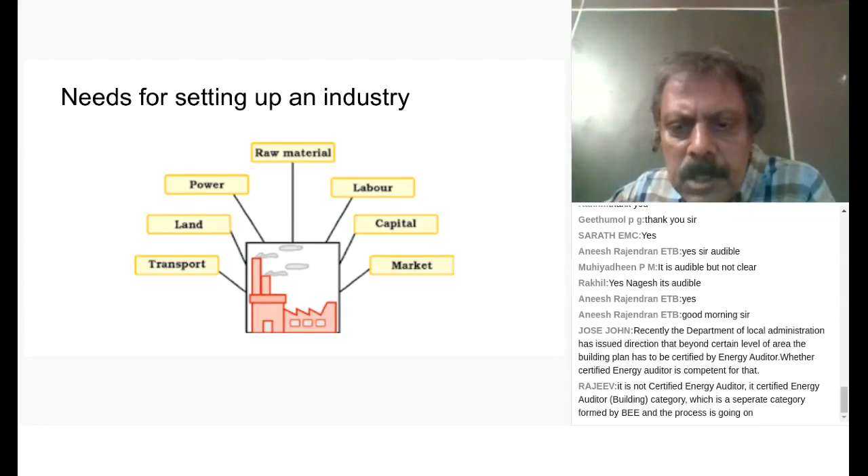So these are the various inputs, and of these, what can we reduce, where can we reduce easily? If you see this picture, raw material — can we reduce the raw material going into the product? It's very difficult. Once you've fixed up the production process, what we're going to do is produce with minimum wastage. So already we've decided on a manufacturing route with raw material getting converted into product with minimum wastage, so reduction in raw material becomes very difficult.

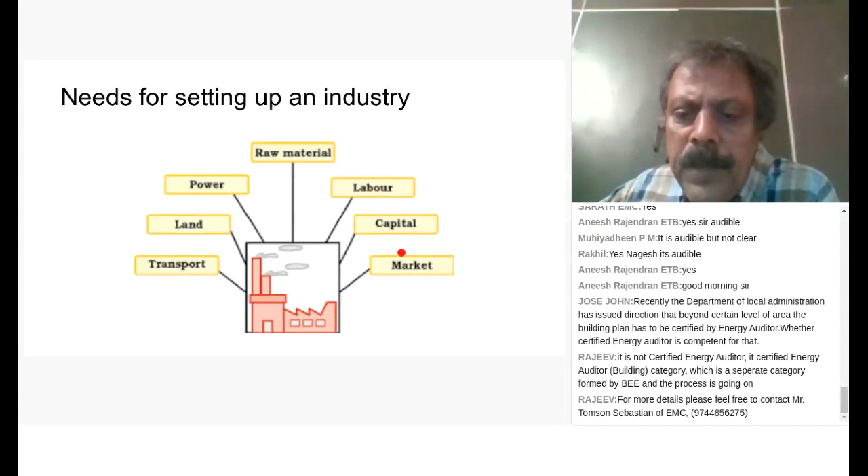Labor — minimum amount of labor is required for doing work, and you cannot minimize labor costs since there are minimum wages that need to be paid to engage labor. So labor costs are no longer considered cheap; labor is also a significant cost. Then the other costs will remain there. But one thing you can see here is the power or energy costs. The energy cost is something where a lot of potential exists.

So this is where we are going to focus, how to reduce the energy costs, because in any manufacturing activity there are a lot of energy wastages that are taking place. Many of these things happen by poor choice of equipment or gadgets in the design stage itself. So in the design stage, if the selection is proper, then your energy efficiency to a great extent is guaranteed. Then in the operations, if any energy wastages are there, that can be rectified by using some retrofits or simple modifications. But the most important thing is to have design stage energy efficiency incorporated into all the process equipment.

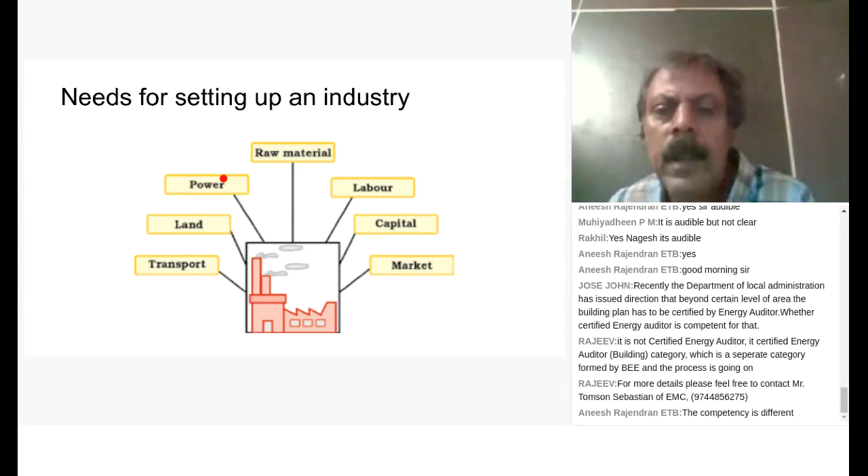Simple example is, suppose we are building a shed, and if you have closed the shed from all sides, daylighting is not coming into the shed, which means you have to use artificial lamps, tube lights or LED lamps inside the shed or the factory. So instead, in the design stage itself, if you incorporate the design for allowing natural light, then you don't need to use artificial lamps for lighting up the shed. So this is one example. Like this, we have several examples where at the design stage itself, if you take care, a phenomenal amount of energy can be saved, which will lead to cost reductions for the company.

Now, when we talk of the product, we are looking at a component called design for environment. This is very popular in European countries, DFE, design for environment. So while producing or designing the product, how best it can be designed so that after the final usage, it is not dumped into wastage. So there is a circulation which takes place. Whatever is the waste, it is recycled back, and again products are produced. So there is nothing called ultimate discharge into the environment or pollution to the environment.

So if you look at this, for example, the conventional thinking is you take raw resources from the earth, then make them, use them, finally dispose them. So we have huge piles of garbage, waste material which are getting disposed into the environment every day, either into the land or the sea or the rivers. So this is a linear approach. That means you take raw materials, convert them into products, use them, throw them. No longer it is going to be used. This is a linear process.

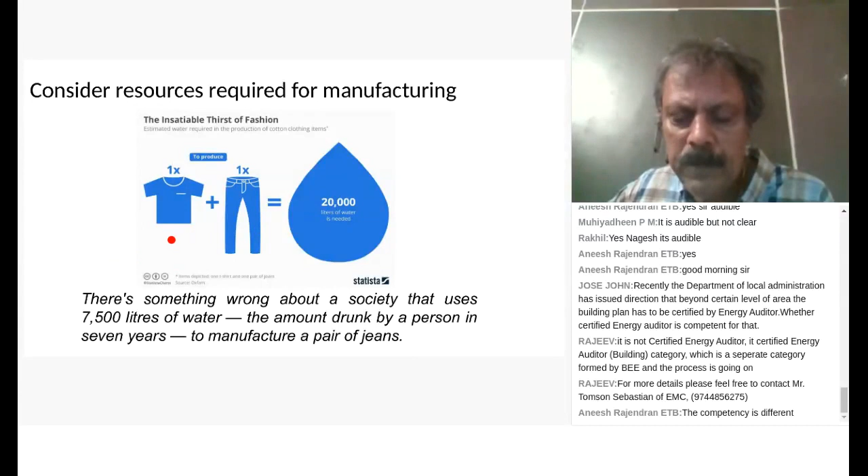So today, whatever products we are using, most of the products are highly energy intensive, raw material intensive, resource intensive, and of course in these processes a lot of chemicals are also being used, which are ultimately finding their way into the rivers and seas, contaminating the land mass. So this is one important thing - that at least in future, for the interest of the future generation and sustainable development, when we look at a product, we look at it not only from the saleability but also from this environmental sustainability.

That means there will be a continuous availability of all resources because you're conserving them. For example, if you're saving water and using the minimum amount, water availability is going to be there throughout the year.

So this is going to make industries more sustainable, and consumers are going to be happier. This will be the selling point in the years to come - how sustainable a product is. In the manufacture or design of the product, whether it has gone through a highly pollution-intensive, resource-intensive or energy-intensive process, and how we can dispose of the product in an environmentally friendly way - these are all factors the consumers of the future will consider.

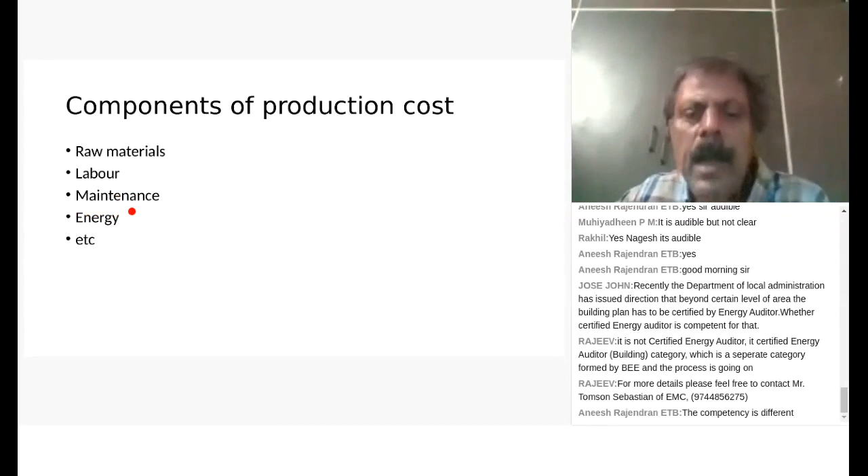As we said, not much can be saved in terms of cost on raw materials, and definitely not on labor. Maintenance cost - some amount will be involved since we need to maintain the equipment and the factory. But energy - the efficiencies of equipment range dramatically from as low as 1% to 60%. So there's a lot of scope for saving energy, and this is best done during the initial design stage of the factory itself.

The first step to make your factory energy efficient is to look at the tariffs - you want to make energy costs as low as possible. So what is the most appropriate tariff which, if used, will make my energy cost the least? If you look at the KSEB tariffs, there are different categories.

You can be classified as a low tension consumer or a high tension consumer - LT or HT. If you're an LT consumer, power is directly provided from the KSEB lines, and you don't need a transformer. In the HT consumer case, there will be a transformer, with voltage given at 11 kilovolts and then stepped down to 440. These are different categories depending on the intensity of power you draw or use - for example, there's something called a connected load.

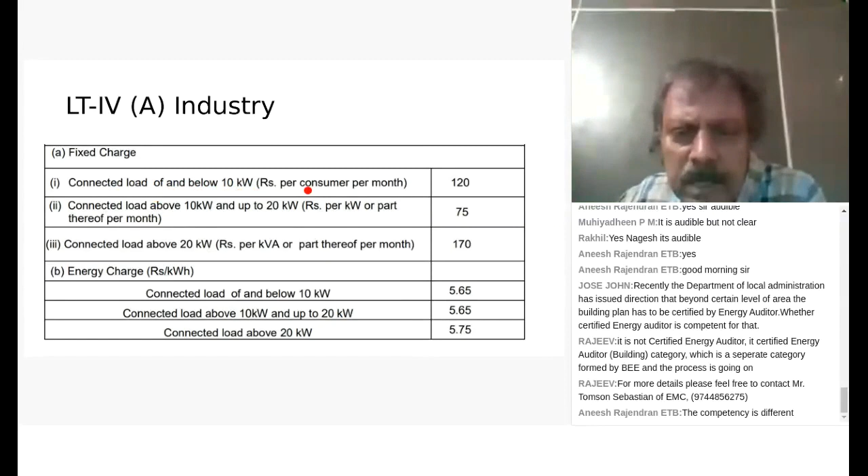If you add up all the motor loads in your factory - say the connected load is 10 kilowatt or below, you pay a fixed cost of 120 rupees per month. If it's between 10 and 20 kilowatt, you pay 75 rupees. For connected load above 20 kilowatt, it's rupees per kVA - about 170 per kVA. These are the tariffs called fixed costs, which don't vary with the amount of energy you use.

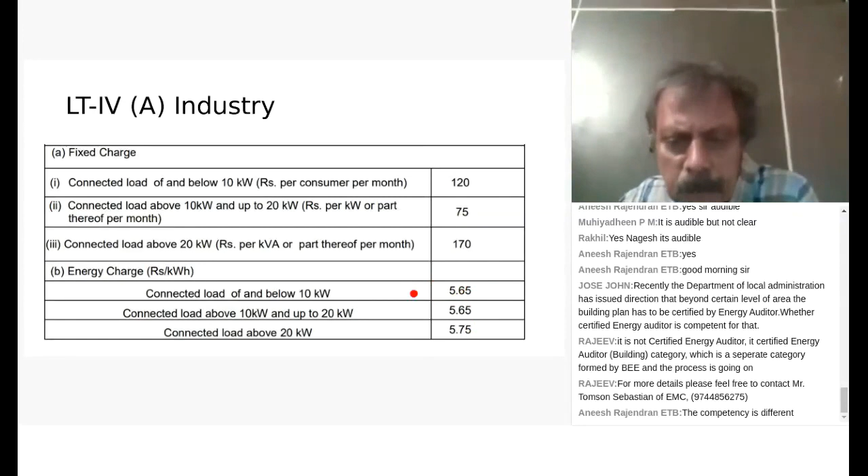Then there's another cost called energy charges, which apply based on how much energy you've used multiplied by this cost - roughly about 5 rupees 65 paise per unit. So this is one category, LT4A industry.

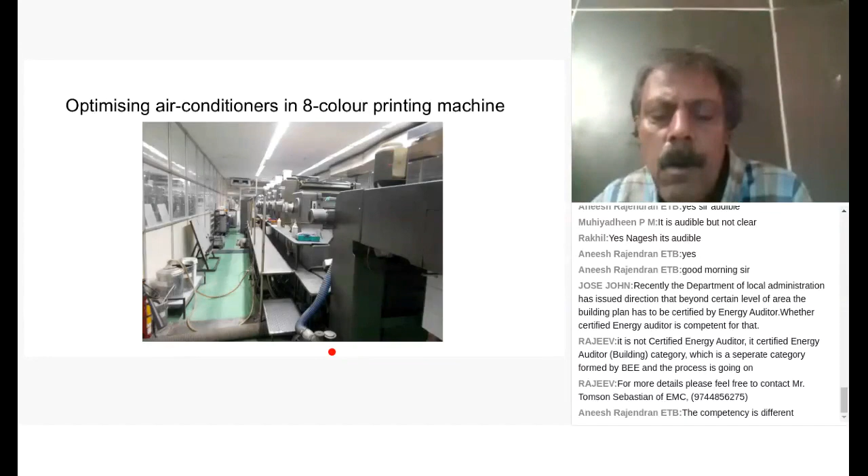Now, the next important thing is the consumption area. So we have the tariff decided, we have fixed the clause, what tariff clause we are going to be using. Then coming to the equipment point of view, what are the possibilities, where all we can possibly bring about optimization of energy or saving of energy?

For this, you have to look at your installations in a broader way. For example, in this slide, what you're looking at is a simple printing press. This entire room is air conditioned. There's an 8-color printing machine in this room, and there's an air conditioner here. You see all the lamps and the air conditioner. The entire room is air conditioned.

Now, if we use an air conditioner, it's one of the most expensive equipments to use. We also use it in our houses. So a 1 ton AC, if you're using it for 1 hour, you may be consuming nearly 2 units of energy. That means in the industrial tariff we saw, it works out to almost 13 rupees per hour when you operate an air conditioner.

Now here, that means you have to have a simulation. What will happen when we start the printing press, when the air conditioner is required, and why it is required. So you have to question every equipment.

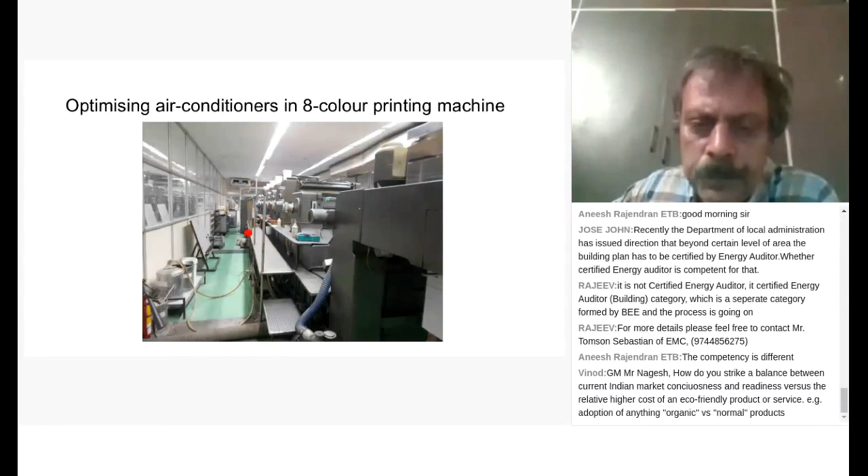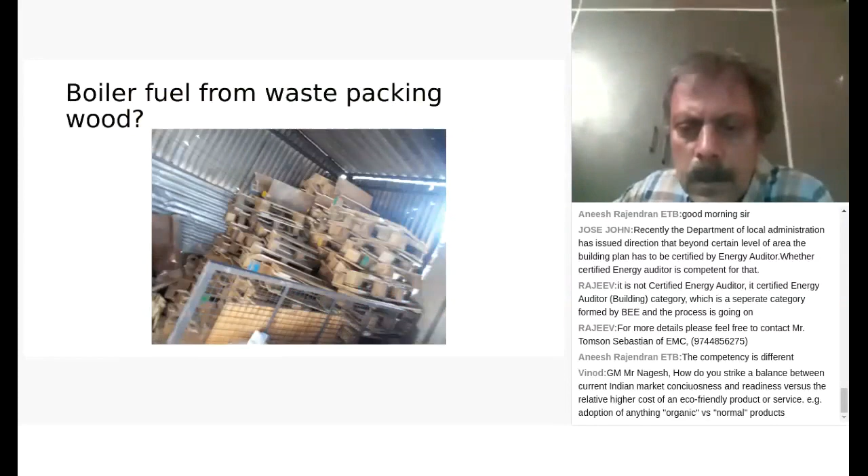Now, what happens in a printing press is, when there is one run and some product is produced, when they change the product, there is almost about 10 hours gap for changing the rolls, changing the screens. So many other cleaning processes take place during this 10 hour gap in which rolls are changed, screens are changed, and cleaning is taking place.

Now if you see, we need to question: do we also need to run the air conditioner when there is no production, when only cleaning is taking place, or when roll changing is taking place? Do we need to run the air conditioner? In this process, the printing press was doing that, and it was not the right practice, because there is no need for air conditioning during the changeover period.

So what was done was we cut open the wall and provided an exhaust fan. Once the production process is over, the air conditioner will be stopped and this exhaust fan will operate. The exhaust fan is about 50 watts, while the air conditioner is about 1200 watts. So you can see the difference.

So here the objective of providing the exhaust is to exhaust the fume. Printing produces a lot of fumes, and the fumes have to be exhausted. So for this, the fan was provided. The air conditioner will be stopped and the fan will operate once the production is over.

This is something which possibly in this case we had this provision. This opening was there and we were able to cut it open and provide a fan. So it's a case of retrofit. But in many cases you can do this right at the design stage itself, which will avoid a lot of complications. Many times for retrofit you may not have space, and it will be very difficult to accommodate something in this case.

So what we are looking for is, why this AC? First of all, why AC at all? You have to question each and every application - is there a requirement? Then they said all the bearings, the machine itself is from Germany and it needs to operate at 25 degrees. So then the AC is a must.

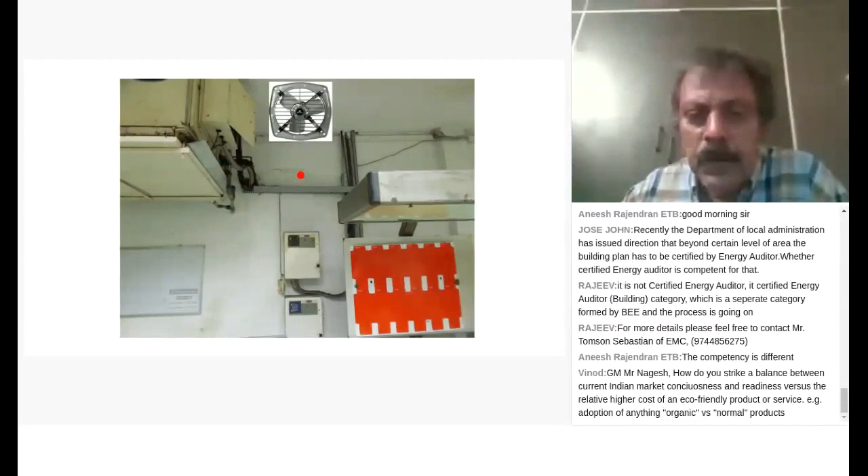Beyond this, what you need to think of is what are the temperatures during the daytime and nighttime in this city. Typically nighttime temperatures are very low, and even in warm climates, nighttime temperatures touch 25 degrees for about 3 to 4 months. So for those 3 to 4 months, can we avoid the air conditioner and put a blower? It only blows air inside. Outside air is already 25 degrees - you blow cold air from the outside ambient and then exhaust it continuously. This is called once-through cooling, or free cooling.

You don't need to run the air conditioner. Take the outside air, blow it inside the room, and exhaust it. This makes the environment clean, and we make use of the low temperatures available during night time, or in the winter season when even the daytime temperature is around 25 degrees. So ideally, in the design stage, this air conditioning system should have been made the most energy efficient.

Maybe we could have gone in for an inverter based air conditioner, and had a blower which would blow the air once the temperature allows. You can have an ambient air sensor to measure the temperature of the outside air. If it is less than 25, it cuts off the AC and starts a blower. The blower will blow air from ambient inside the room, and the exhaust will take away the air from inside. These are all things you can consider during the design stage.

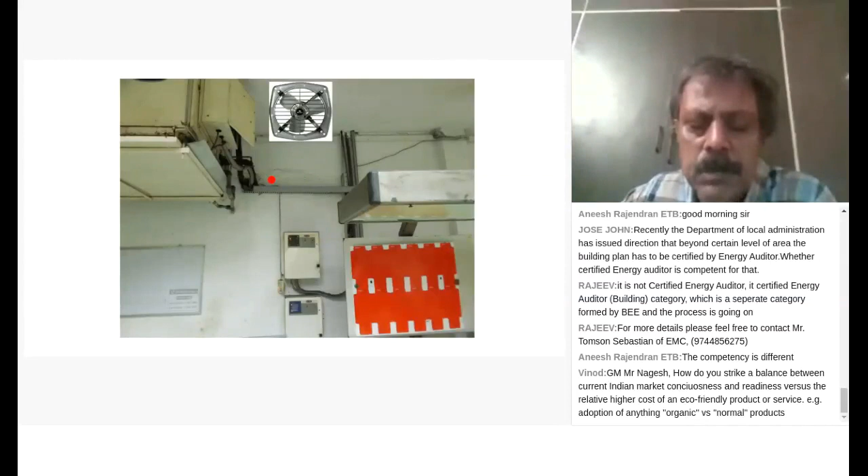Of course, each factory will have unique applications, but conceptually, the approach to design stage efficiency is very similar. As we said, it's only about questioning why it is required. If at all it is required, are we going in for the most energy efficient equipment? Then what is going to be the operation - is it 24 hours continuous or on and off? During off time, what happens? When you keep on questioning, you automatically get ideas and arrive at the most efficient design.

In the same company, a printing press, the paper rolls are coming for printing cartons. They make cartons for various products, and these cartons come from paper mills packed in wood. This wood packing is removed, and then the carton is taken for production.

Now what do they do with this waste packing wood? If you sell it to someone taking away all this waste, he may give probably 50 paise per kilo or something like that, or sometimes you have to pay for removing it if there's no need in that area.

Instead, this printing press had about 300 employees and a canteen, which wanted a boiler. They had a boiler using diesel. Now, instead of using diesel, it was suggested to use this waste wood, so they converted the boiler and started using it.

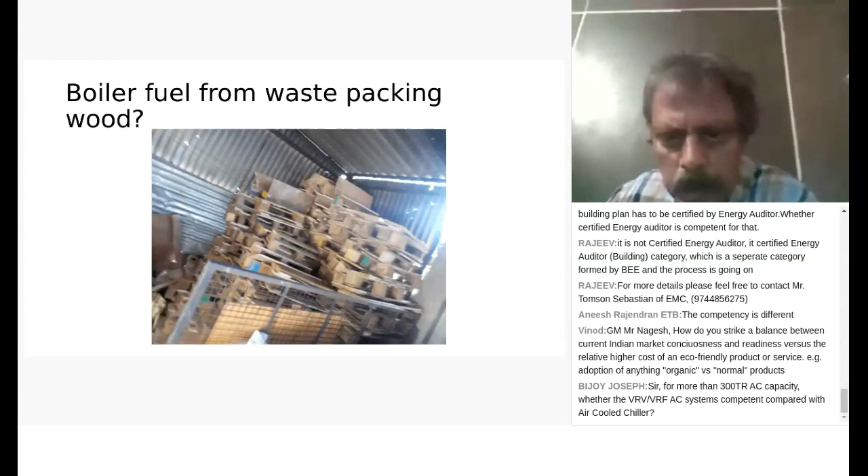Coming to some of the machines that you will be using, say CNC machines or presses or any other machine tool, it uses a lot of oil as well as coolants. So it takes away the heat from the machines. The machine will be there and some work will be performed, heat will be generated, and the heat is removed by circulating oil or lubricant.

So these oils will have to be cooled. Again, there will be a hydraulic power pack in some of the presses and other equipments, where hydraulic oil will be circulating inside the machines. So all the heat will be removed from the machines and taken out, which again has to be further dissipated to the environment.

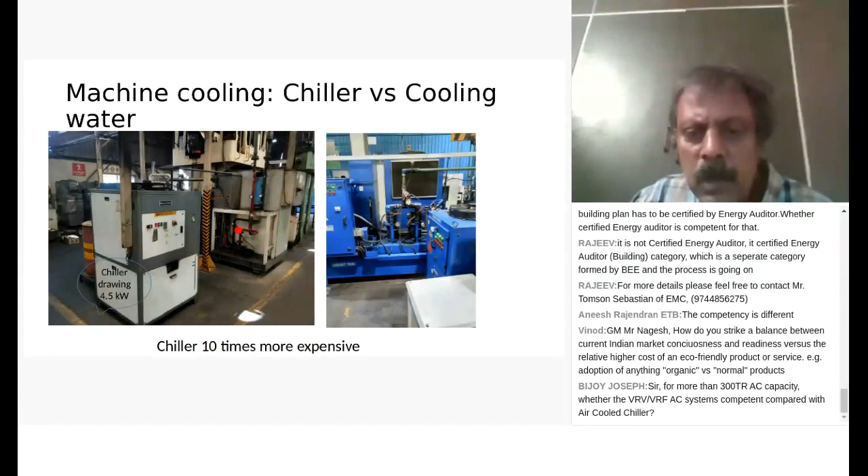Now when you use a chiller, you can of course cool this oil or the coolant, but the simpler way is to use cooling water. Whatever water is available at ambient temperature is about 30 degrees, so you can use that water for cooling these lubricants or coolants, because a chiller is very expensive. You have this compressor, typical air conditioning components, whatever is there in this also. So the chiller is 10 times more expensive than cooling water. So wherever possible, use cooling water to remove the heat and don't use a chiller inside the plant.

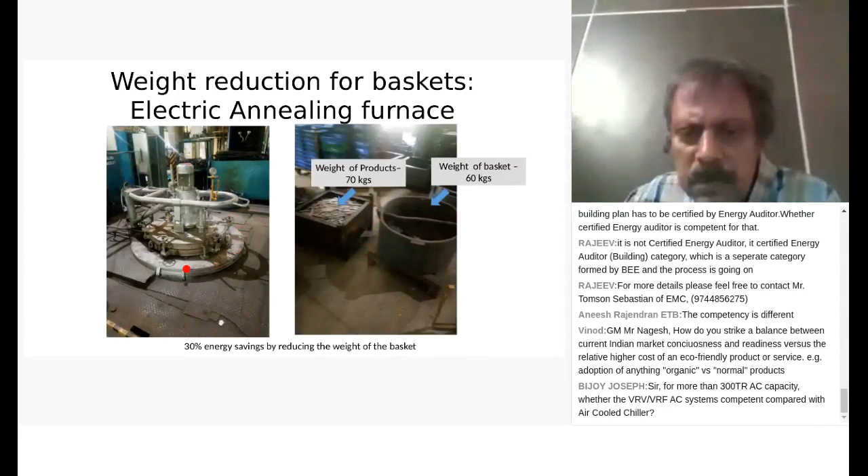Other important things which matter, looking again, basically most of what we are trying to say is based on common sense and also some amount of lateral thinking.

If you see, this is a furnace, underground furnace. This is a lid, and whatever treatment happens here is annealing. Annealing means some kind of heat treatment is done to some products. So this product will be put in this basket. This basket will be lowered inside the furnace. The lid will be opened, and this entire basket containing the materials will be lowered inside the furnace. The lid will be closed, and then it gets about 800 degrees centigrade, where annealing takes place.

Metallurgical properties change. This is an electric furnace; electricity is used for this. If you want to heat up the materials inside the basket, you also have to heat the basket itself, so heating also takes place for this basket.

And if you measure the weight of the products, it is only 70 kgs that is going into the basket. But the basket itself is weighing 60 kgs, so almost an equal amount of weight is there in the basket. That also consumes energy. You have to heat that also to 800 degrees centigrade and then cool it, resulting in a lot of energy wastage.

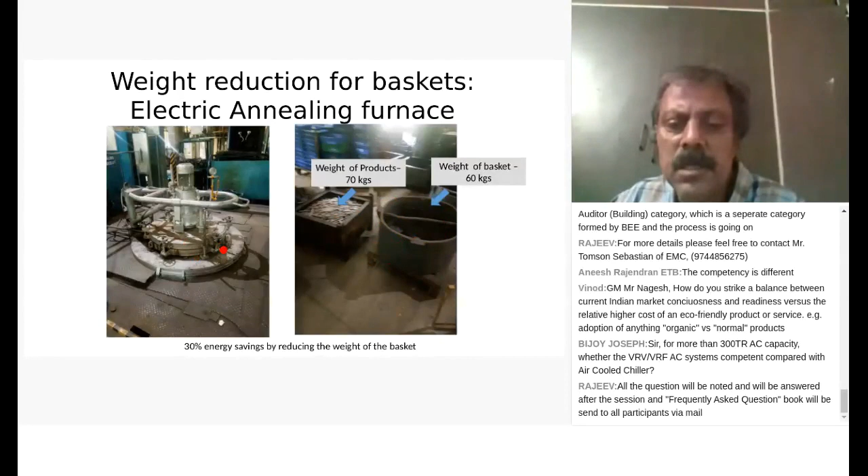But the basket, can we reduce the thickness of this material? So from 60 kgs, can we bring it down to 40 kgs or 30 kgs? There is no functional value for the basket itself; it is only to hold this material which needs to be annealed. This weight reduction can save 30 to 40% of the energy used in this furnace. That means a little bit of value engineering, where you try to see what should be the minimum weight of this basket which can hold this product, and accordingly we keep reducing the weight of the basket.

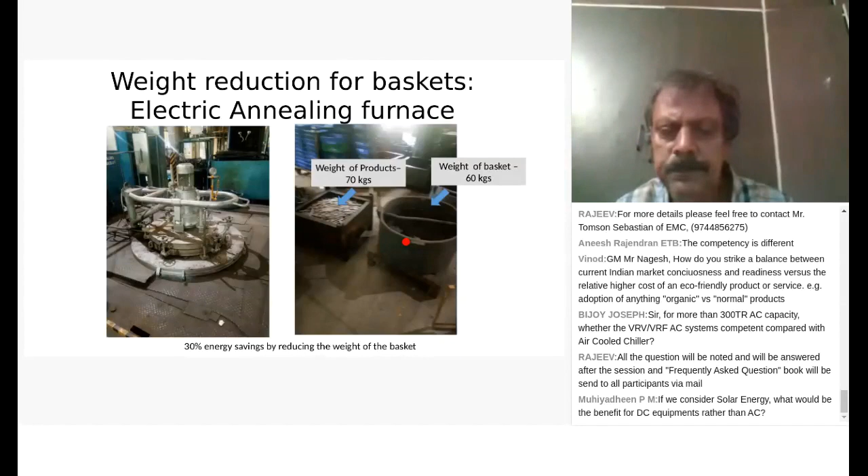Another important thing to consider is capacity utilization. Once you put up a facility, you have to utilize the capacity to its fullest. Suppose I have a big furnace meant for 70 kgs, but instead I'm putting only 30 kgs, then my energy cost will go up. So how to plan and schedule operations? I accumulate some material and wait for more jobs, then do the heat treatment in one go.

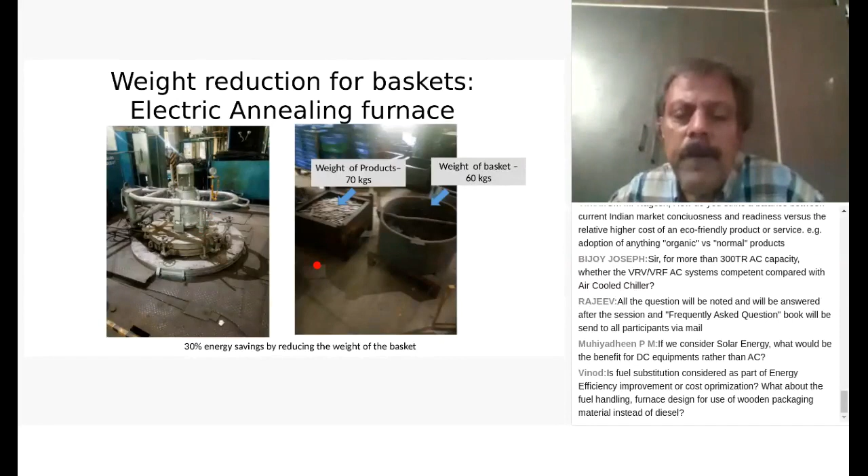These are all things that have to come into the initial design phase itself. That will also determine the size of the furnace. If you go in for bigger equipment but use only smaller volumes of work, the energy consumption is going to be high. So you have to appropriately size and design the equipment so that your capacity is fully utilized. Whenever you buy equipment, the capacity utilization should be near about 100%.

We've already seen the split air conditioner, which is used in the printing process and also in houses, and mostly in offices. At least 4 or 5 air conditioners will be there in many SME industries that hold an office. The biggest problem with the air conditioner is that it's an energy guzzler - there is a compressor, and it is highly energy intensive.

So the options, as we discussed, are going in for a star rated equipment like a 5-star rated air conditioner, or going in for inverter based air conditioners, which are the most energy efficient. These are the things you can consider.

Also, when your operations are going to be air conditioning intensive - let's say you have an office and above it a terrace - a lot of heat load will come into the room through the terrace. So what we have to do is prevent the heat coming through the terrace. A white paint on the terrace can dramatically reduce the heat coming into the room and reduce the energy consumption for the air conditioner.

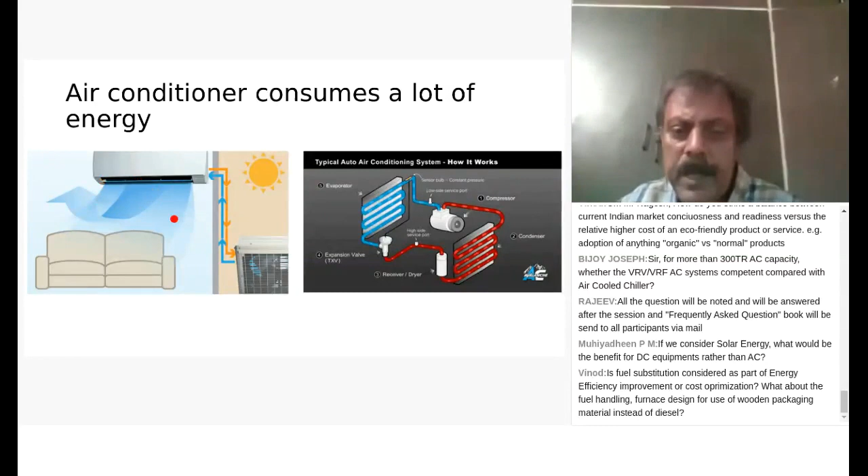Or maybe you can have some shading, some trees or plants on the terrace. They can act as a heat barrier and reduce air conditioning consumption. So there are several opportunities, and when you're operating, in the design these are all things to be considered. When operating, it's better to run at the highest possible temperatures - if you're operating at 26 or 27, your energy consumption can significantly reduce.

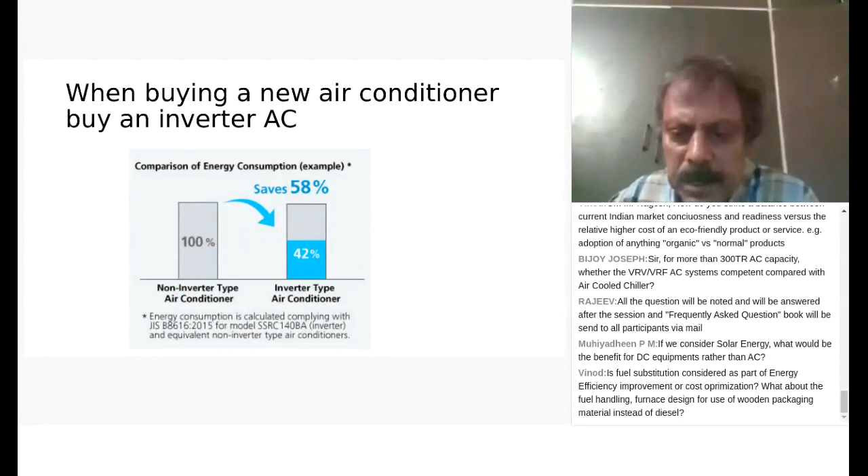Comparing a non-inverter type air conditioner with an inverter type: if a non-inverter AC is consuming, let's say, 100% of energy, then the inverter type will consume only 42% of the energy - a 58% saving compared with the non-inverter type. So go for the best possible designs.

And if you want to know what is the most energy efficient equipment available in the market, there is one source called the Bureau of Energy Efficiency, beestarlabel.com. If you go to this website, you have all these appliances - tube lights, refrigerators, air conditioners, pumps, transformers, irrigation pump sets. Several products are there. The Bureau of Energy Efficiency has done a lot of work and created this kind of software selection process.

If you click on transformer, wanting to select the most efficient one, you'll see all the manufacturers producing that and which manufacturer got the highest efficiency for the range you're considering. Similarly for pumps, motors, lamps - most appliances are covered under this. So if you have any doubts during the initial phase about which one to select, which is the most energy efficient, simply go to beestarlabel.com.

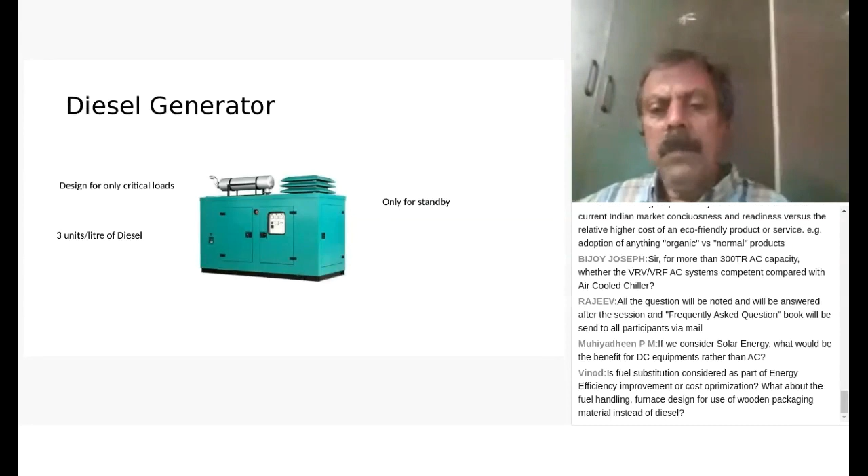Then, every industry will have a DG set, a generator for standby. It depends again on the criticality of the process. If you want some standby and the process is critical so that you cannot stop it, then you can have a DG set. Otherwise, if you feel the plant can stop for some time until power comes back, then don't buy this. It's a white elephant.

So this is again something to consider. First, as we said, eliminate if possible. A diesel generator is only a standby equipment. Whenever the grid supply, the power supply from KSEB, fails, only then are you going to operate this equipment. Why do I need this? How often? What is the reliability of KSEB supply? So you have to find out, in your area, what is the reliability.

Can I get reliable power? If there is a power cut, what will happen to my equipment? Can it tolerate about half an hour or one hour before the power supply is restored? Or should I immediately start the DG set to save the process? All these questions will tell you whether a DG set has to be purchased at all. Is it required? If it is not required, eliminate it, because it's a headache since you're not going to use it. It will only be used when there is a power trip or power failure, and for that you'd have to maintain this big elephant, which is not required.

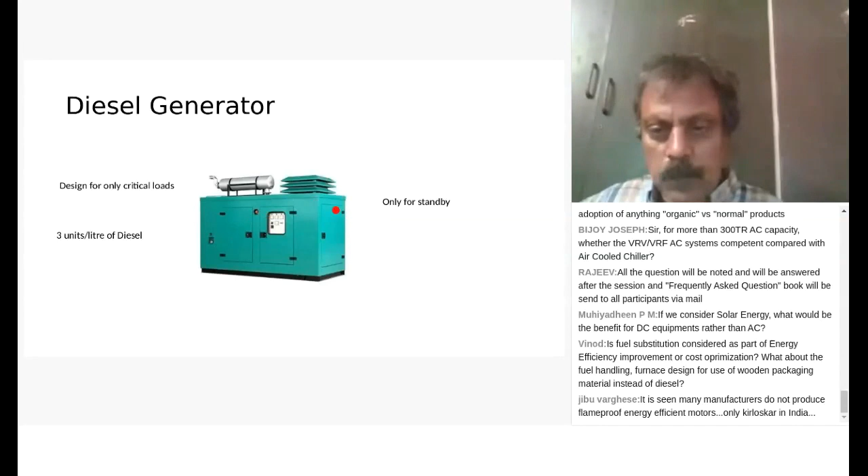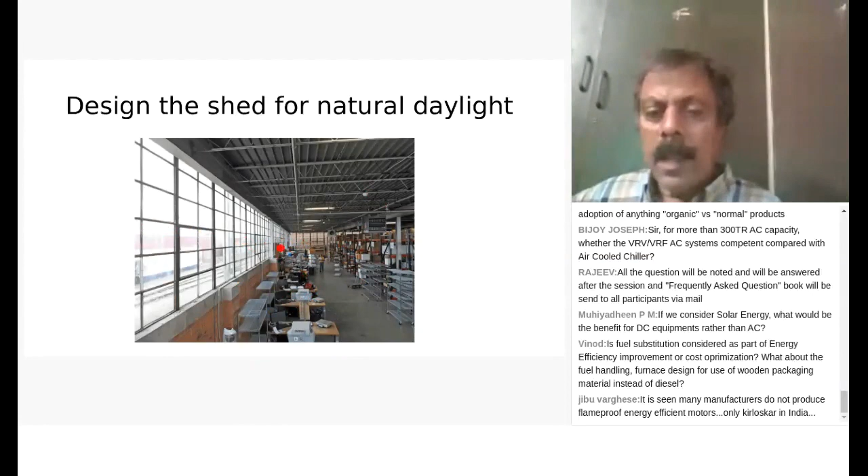The next important thing is the lighting, as we discussed. There's plenty of daylight around, but we are closing everything and sitting inside in darkness. So when constructing the shed, see to it that maximum light passes through the roof and the sides, so you don't need to use lamps during the daytime. This is a simple, one-time measure that saves energy for a lifetime. For at least 10 hours of operation during the daytime, we need not use these lamps. Also, working in daylight is more comfortable than working under lamps, so it improves the productivity of the labor, improves morale and motivation, and we are making use of natural light.

So far we have seen the possibilities that exist on the process side - how you can select equipment, how you can operate equipment so that overall energy consumption can be minimized and energy efficiency can be incorporated into the design stage itself. That is from the consumption side. Now, from the generation side, we are interested in cost reduction. Though energy efficiency has several benefits, like preventing global warming and extending resource availability, our focus is on cost reduction - how to reduce our energy cost. That is the objective. So what we have seen is the consuming equipment side and all the possibilities that exist. These are examples, but a wide variety of possibilities are available depending on what kind of industries you are going to put up.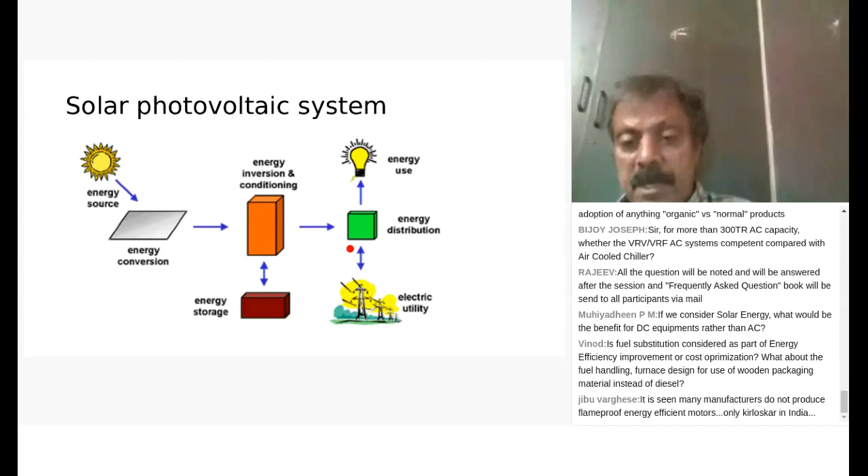But the amount they'll be paying for this supplied energy is not very significant. So one option is that Sunday's energy you can store through a battery and use it in subsequent days, Monday, Tuesday, and so on. These are the options you have to think about before putting up solar energy - whether it's required, is solar photovoltaic going to make economical sense, and is it worthwhile. Do you have space first? All these things need to be considered.

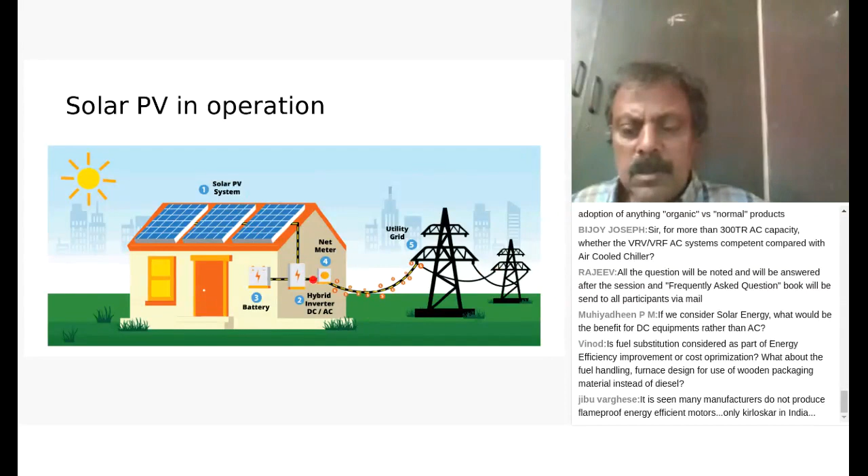If you see here, there is a rooftop, so here space is not a problem. Already there is a roof. You have the panels on the roof, and from this roof it goes to whatever you consume, and the remaining goes to the grid. This is one system.

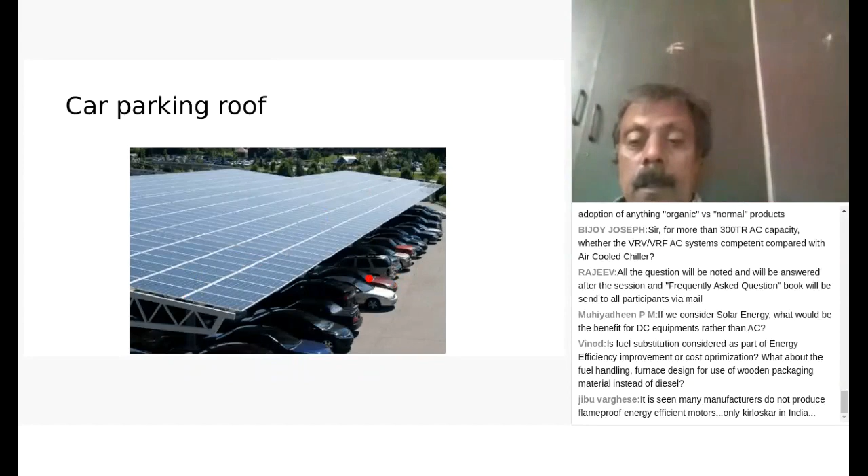Space is something very critical nowadays, especially in the cities. So some have become innovative, and wherever there's car parking, they've provided solar panels on the roof of the car parking shed. This is one way of mitigating the space problem.

What about the cost? Right now the cost for solar PV is about 60,000 rupees per kilowatt for grid connected, if you directly connect it to the grid without a battery. With battery, it comes to about 80,000 rupees.

There are different models. One is that you yourself can put up the 60,000 rupees and have the solar PV installed. Otherwise, there's another model called the OPEX model. There are a lot of private players in the market who say: give us your roof, we will come and put up the panel, and whatever energy we get, we'll give it to you at say 1 rupee less than the power you'd pay to KSEB. This is one model, the OPEX model.

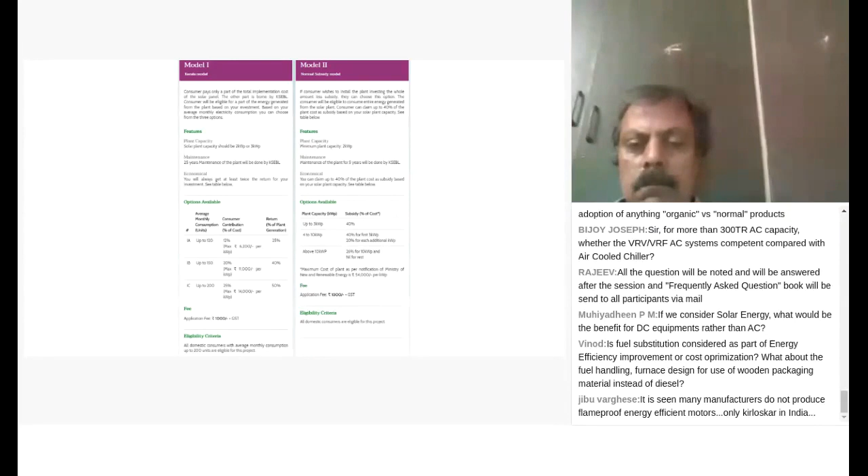Here it becomes even more challenging because the power costs are very low. Already KSEB is charging only 2 rupees 30 paise, and your panel cost remains the same at 60,000 rupees. So the economics is not very attractive at today's electricity prices. Whereas for industry it is about 7 rupees. So comparing 7 rupees for industrial electricity to 2 rupees 30 paise for agricultural, the payback period will be almost 3 times - it goes up to 20 years.

But where it is advantageous is where you have a lot of power interruptions and KSEB is not able to lay long power lines into inaccessible areas. So there, in isolated cases, whatever the cost, this is definitely an advantage.

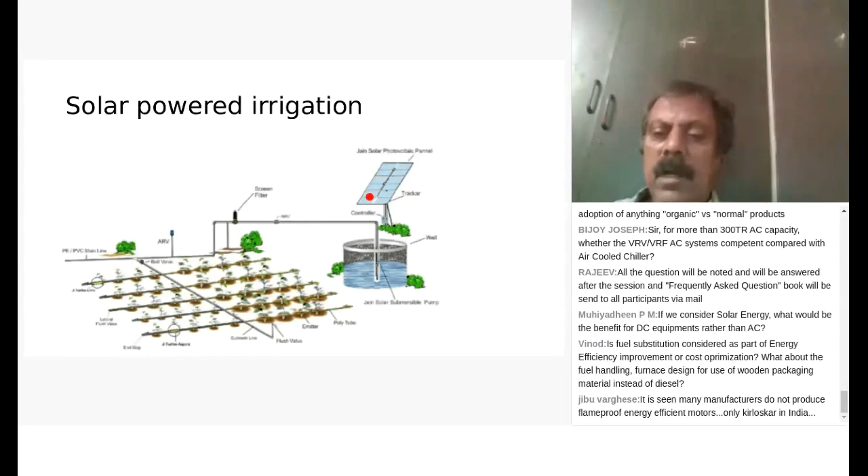The other energy source in the industry is thermal energy. Whatever we have seen so far is the electrical energy per part. Now, thermal energy, many of the industries may use steam. Suppose, especially if you are a food processing industry, steam may be required or hot water may be required. Now, there are different methods by which you can produce thermal energy in the form of steam or hot water.

So one is you have these fuel sources: coal, firewood, rice husk. These are all different types of bagasse from the sugar mills. There are all different types of solid fuels. And of course, in Kerala, we have coconut shells, then coconut husk, the fiber part.

So here you can see this is a boiler. A boiler is burning purely with coconut shell. The coconut shell is a very good fuel. It's got a very high calorific value. So it's a very popular fuel.

But in many of the cases, the coconut shell also gives you a value-added product, which is the charcoal. So from coconut shell, you can convert that into charcoal, which is used in many of the water treatment applications. For removal of odor from the water, this charcoal is used and there's a huge demand for this. So coconut shell mostly is converted to charcoal.

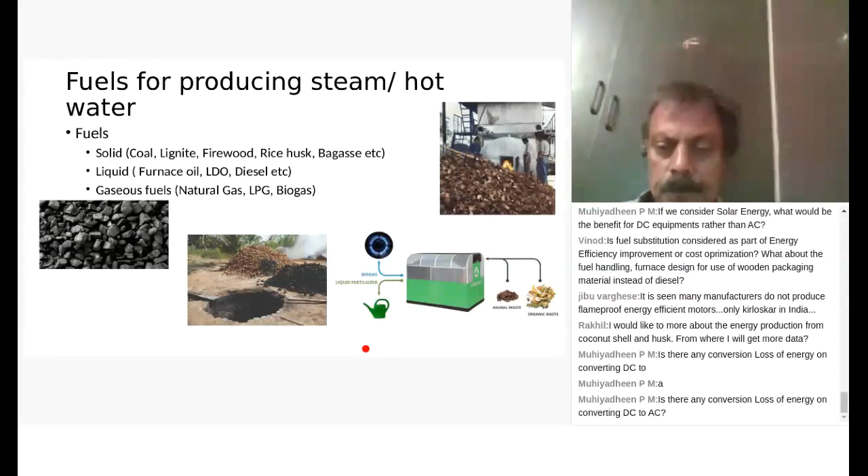Now, if you want steam or hot water, you can also do it by solar or the renewable energy sources. One of the renewables we saw is the biogas. Biogas can utilize any kind of waste, say kitchen waste or the waste material from the trees. Anything can be used. The other renewable source for steam or hot water is the solar collectors.

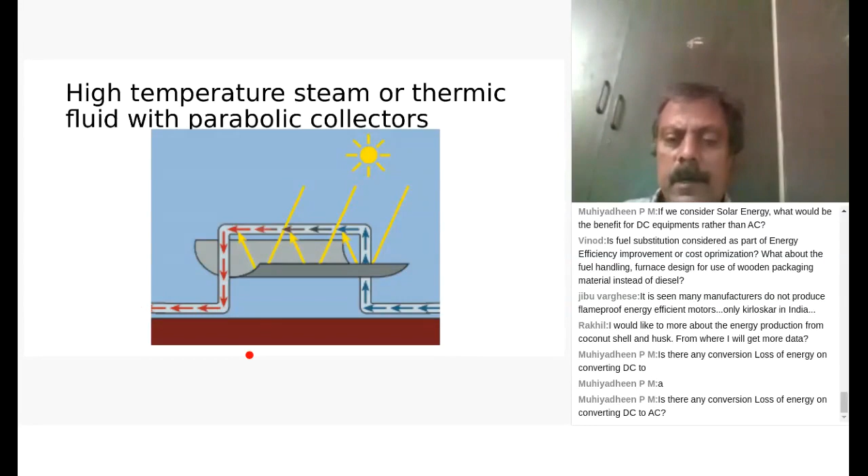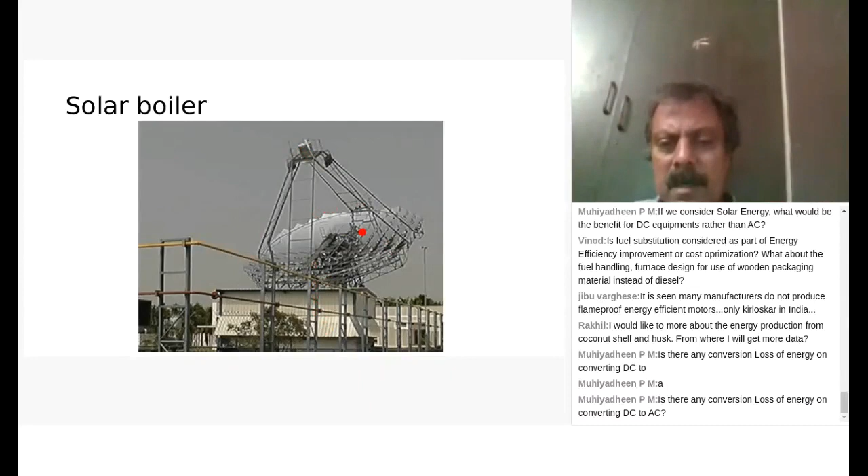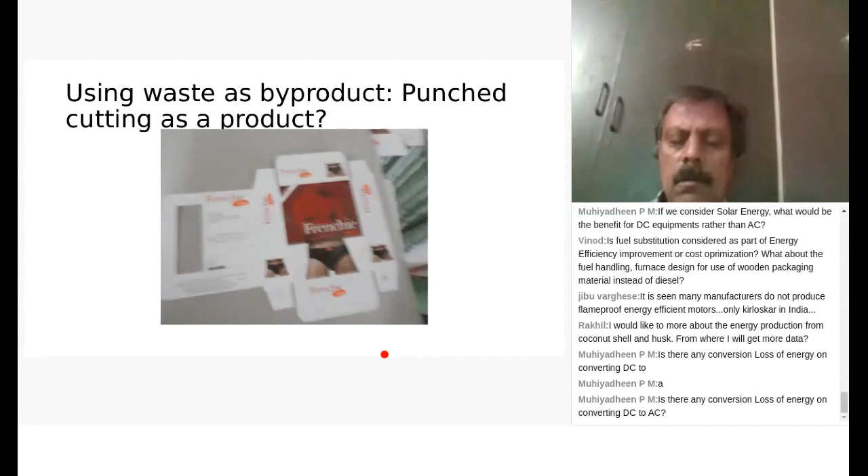Beyond energy, one more important thing you need to focus on is how you will minimize your wastages. There is nothing called a wastage. Everything is a purposeful raw material. What is waste for you may be a raw material for another factory.

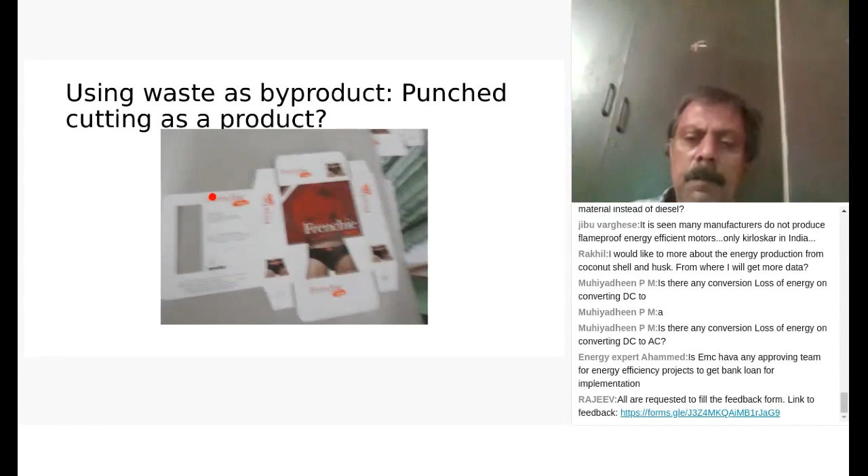So in the printing press case, it's a simple process, so we're taking that process. Here is a carton box made for one company. This carton box wanted to have a slit here, so one cutting is made in this part, and a polythene paper is covered on this, just to see what is the color of the cloth inside.

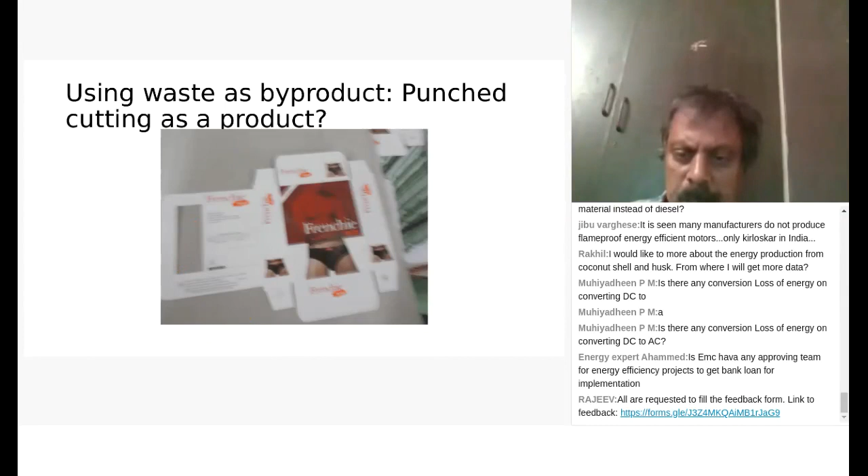Now what happens to this cut piece? This is already made, and now this cutting of this portion of carton is going to be done. What happens to that piece? It's going to be like this - a punched cutting. Now there are thousands of pieces coming out of this product.

Can we effectively utilize this for some other purpose? Today they are throwing it into the waste, and the waste paper man comes and picks it up for a very nominal rate - he is taking the wastages. So instead, you can use it as a billing tag. Provide the price rate on it, and attach it to a cloth or some other product, as a price tag. So use it as a tag - it can be directly used as a product.

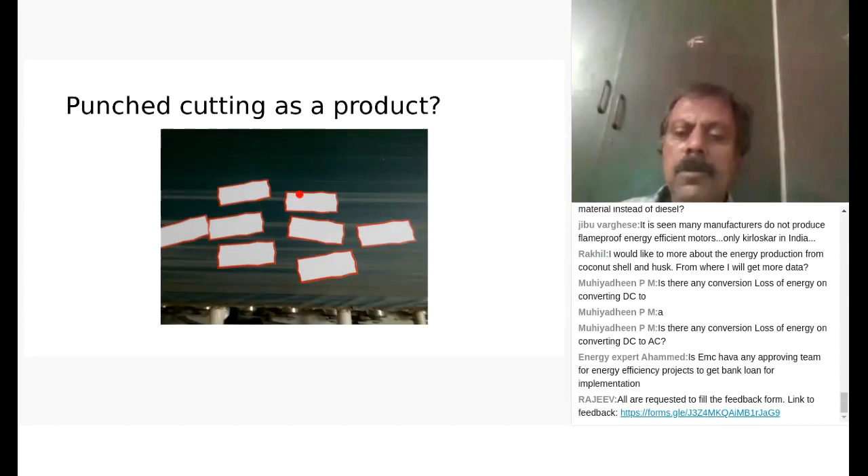Similarly, the other cuttings - one more carton has got this kind of shape of cutting. We need to identify how we can effectively utilize this kind of waste, which is otherwise thrown to the waste paper man, who will send it to a pulp factory, a paper factory, where it will be dissolved, made into pulp, and again paper or carton will be made. So you see that is a wastage in the whole process.

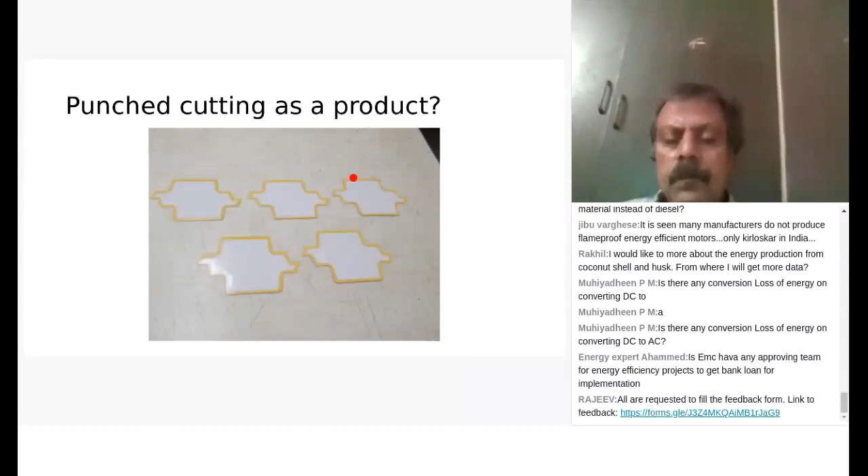Similarly, this is another cutting which is there - how to make use of this product. There are several innovative thoughts that can come once you have maybe thousands of pieces like this. So instead of throwing it and pulping it, can we directly put this to some use?